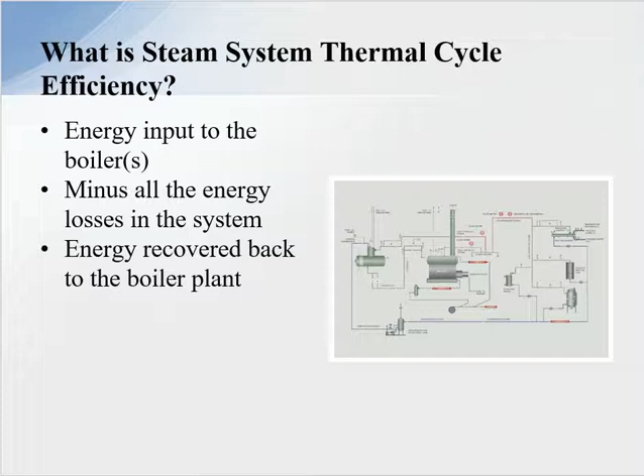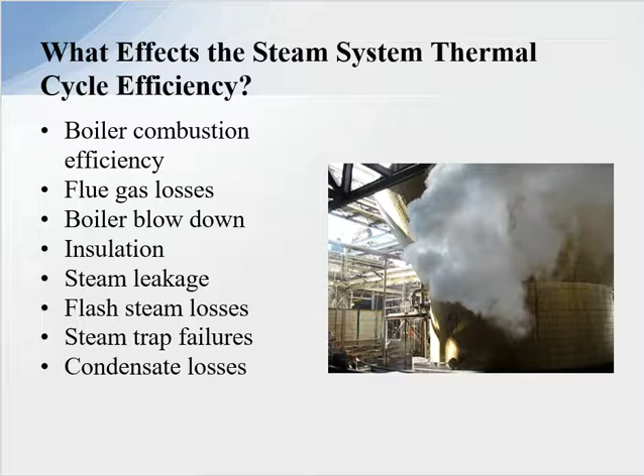What affects the steam system thermal cycle efficiency? Boiler combustion efficiency. People always ask, what's your steam system thermal cycle efficiency? And they will say 82%. No, that's boiler efficiency. That's not steam system thermal cycle efficiency. But anyway, boiler combustion efficiency, flue gas losses, boiler blowdown, insulation, steam leakage, flash steam losses, steam trap failures, and condensate losses. Those are the things that affect the steam system thermal cycle efficiency.

Let's just talk about the steam generation operational losses. Probably one of the largest losses is the flue gases leaving the boiler operation. So right here is the flue gases coming out the boiler. And that can be attributed to 12, 14, 16% of the energy that you put in the boiler is going to be lost up into the atmosphere due to a number of reasons, which I'll discuss in other videos, but not this one.

Then the boiler radiation losses, coming off of the surface areas. The combustion process itself, are we tuned to the correct fuel-air ratio of the boiler? So are we putting in more excess air than is really required for the combustion process? And the last thing is blowdown. So we have to blow the boiler down depending on the TDS or total dissolved solids in the boiler operation, and that is also a loss.

What's not going to be in my calculations today is the mechanical energy losses. Pressure reduction done by control valves instead of steam turbines. The thing is that using a steam control valve to let down pressure is just a waste of mechanical energy. And we have all types of turbines that are out there today to do multiple purposes.

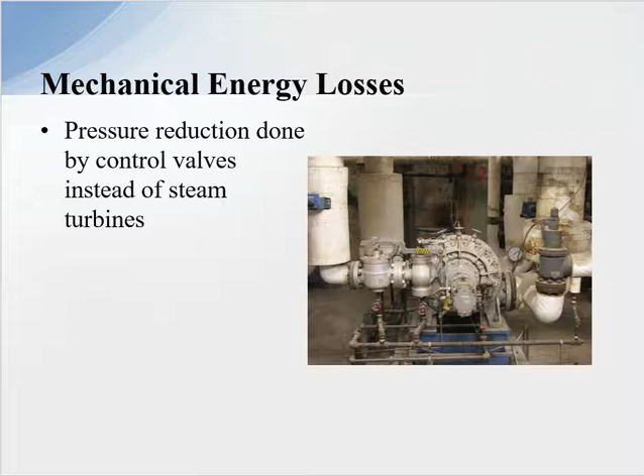So in steam generation losses, for the boiler flue gas, we'll just say 16.4%. It's just estimated losses. Could be less, could be more, but for our example, we're just going to take that. Boiler radiation losses, let's say 0.5%. Continuous blowdown losses from skimming the surface of the boiler drum level, 1.5%, and the bottom blowdown, 0.2%. Total generation losses, 18.6%. Now, the boiler efficiency is done by PTC 4.1, which is really true boiler efficiency, which takes everything into consideration.

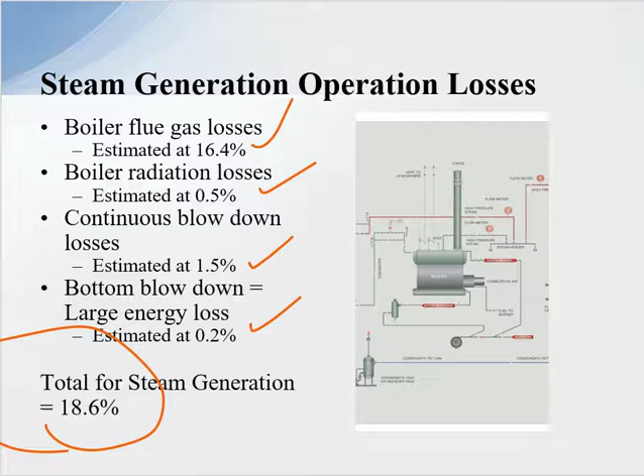Steam distribution system, uninsulated steam lines. Today we insulate everything. Steam lines, valves, excess piping coming off of the system, everything gets insulated. The other thing is steam trap station failures is another area that we have losses. And steam valves open to atmosphere. You walk into the facility all the time, and we have valves open to the atmosphere, a lot of the times due to valve failure, but it's still a loss. And blowdown valves open to atmosphere. They go out to blow down the drip pockets or the steam lines, and they leave the valves open, and then it's another loss to the system.

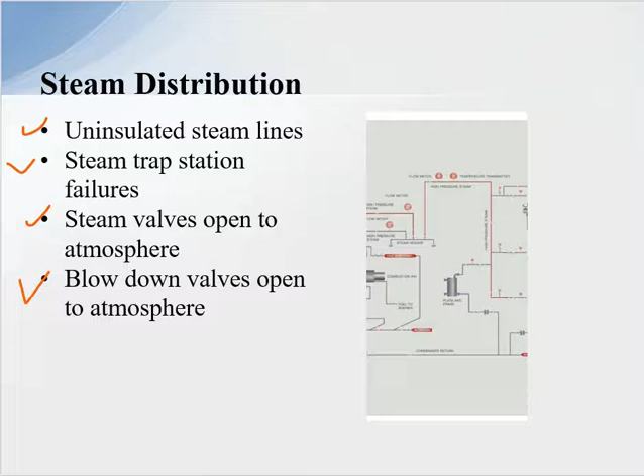Now, depending on the operation, it depends on how great the losses are. Say lack of proper insulation, we'll say it's 6.4%. Steam leakage at 3.5%. Now that is estimated. That can be more or less depending on your operation. Total estimated losses, we come up with 9.9%. And it's common to see steam leakage like this here. So unfortunately it's not uncommon.

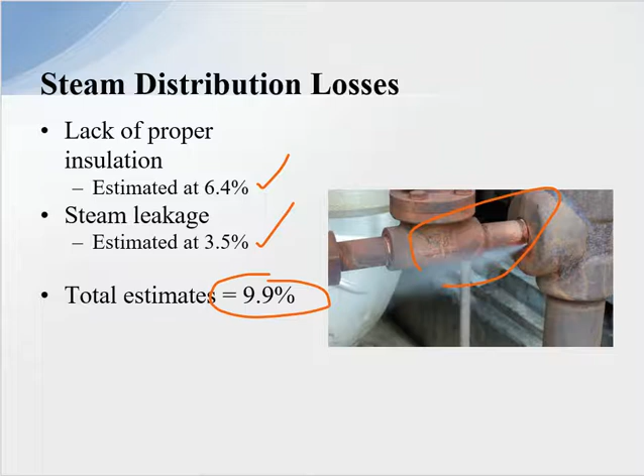And then we have the steam users, the consumers of our steam. One of the things that we find a lot is insulation. They do not insulate the shell of a shell and tube heat exchanger. Jacketed tanks, we don't insulate the jackets. So that becomes a factor of loss of energy. Steam leakage is out there, connection failures, flanges, other types of connections, gasket failures, and then steam trap station failures. Average failure rates are 15% or higher, unfortunately, but the failure rate should be less than 3%. It comes up to a percentage of our losses in the system.

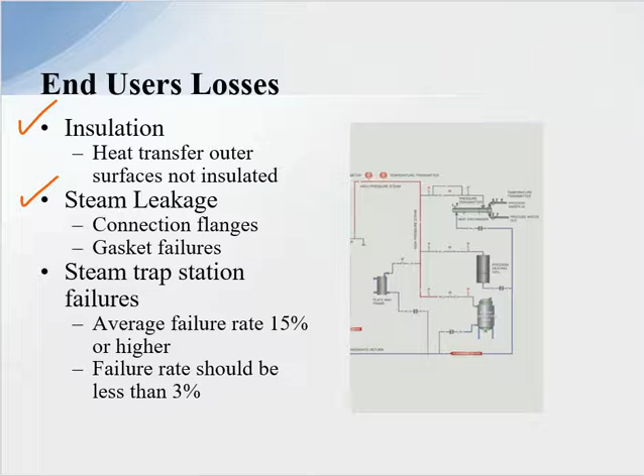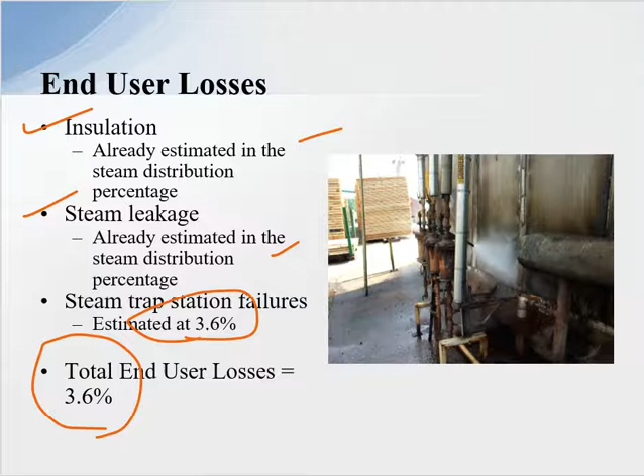So let's review the end user losses. Insulation, we've already estimated in the steam distribution, so we're not going to add another percentage for that. Steam leakage, we already did in the steam distribution. Steam trap station failures are estimated at 3.6% of the energy that we put into the boiler lost to atmosphere. Again, depending on the system, it could be more or less. So our total end user losses is 3.6%. We're going to add this up at the end and come up with our steam system thermal cycle efficiency.

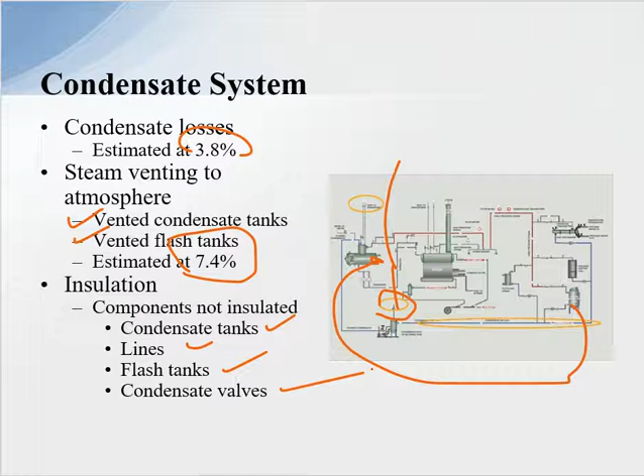Insulation, components not insulated. People don't insulate condensate tanks, condensate lines, flash tanks, condensate valves. Remember, today everything gets insulated. So we're going to say loss of condensate is at 3.8%. Steam losses to atmosphere 4.4%. Insulation, again, already added under steam distribution loss, and we come up to 8.2%.

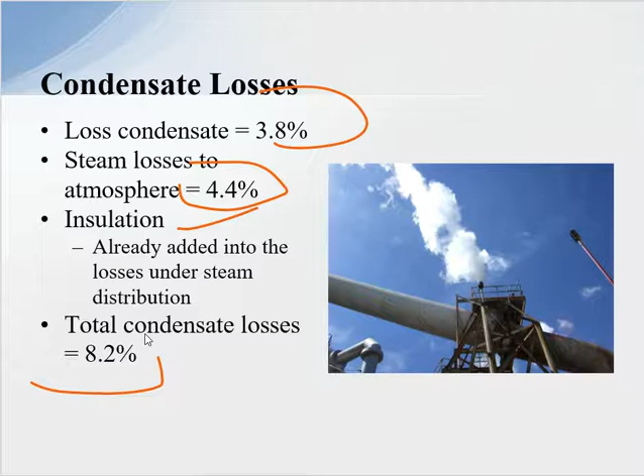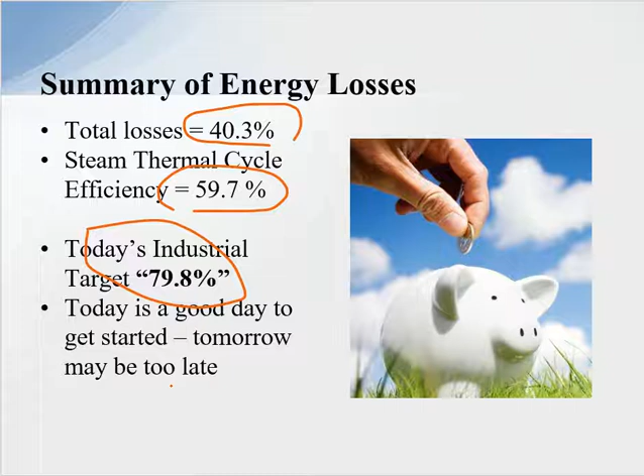So just a summary of the energy losses. The total losses that we estimated is 40.3%, and my thermal cycle efficiency is 59.7%. So 40% of the energy I put into the boiler is not going to be utilized usefully. It's just losses in the system. Today, our target for steam system thermal cycle efficiency is 79.8%. So your benchmark is, what is your steam system thermal cycle efficiency? Today is a good day to get started. Tomorrow might be too late.